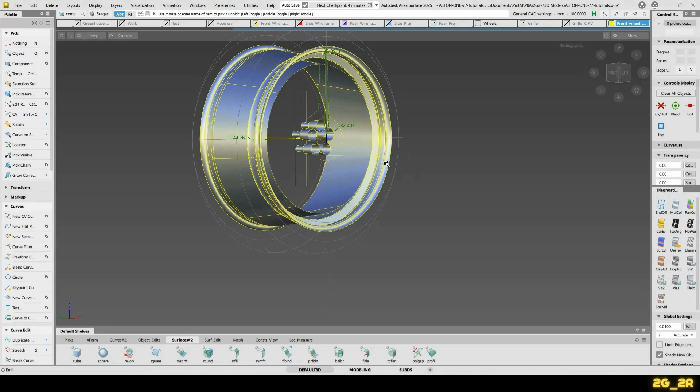That's a good start. Now, let's look at this again. 7 spokes. That's 1 spoke going right down the middle of that. If we split it in 2, we can build only this piece, duplicate once across, and then all the way around. That's pretty good. Pretty good.

So let's get these curves in first. That's what I want to do. I'm just trying to decide how to do it so I know it's going to be nice and clean from the very beginning. So for that, I will work on this layer. I will go into layers.

And I want to create a symmetry plane. So I'm going to set this symmetry plane for this specific layer to be linked to that point. And I want the plane going across the wheel. So that defines, let's say, the diameter, however you want to call it. So it's going to be that plane for me. The reason why I'm doing that, you'll see it soon, is

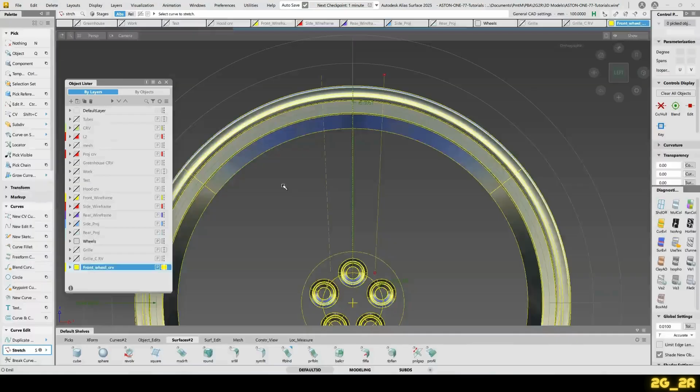That will do. And now let's turn on the symmetry there. And there we have it. That's the magic that I'm looking for. You see that one spoke seems kind of that size there. The other one will be the same size. And then we've got the opening there. So if I take myself a curve that's almost the size of that hole, I can bring it across, up.

And we see that that is happening quite close to the bolt hole, the hole for the lug nut. So, got that in there. Then this curve, I'll move its pivot there, and I'll try to generate myself another one here, which is reflecting the fact that I want to go 7 times around that circle.

But first and foremost, let's do a small offset of that. Let's move it out first. There we go. And I'll do, let's say, a 5mm offset of that. That's that. And let's get this central area in. So that central area seems kind of like the middle there. So let's go like that. I'll open this as well, ever so slightly, but not as much as that one. That's good.

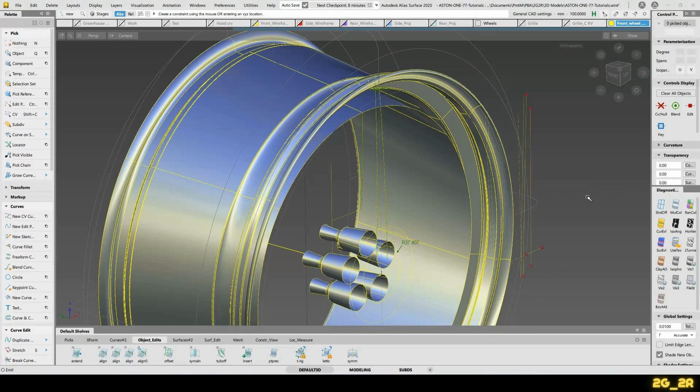So I've put everything on a plane here, so it's easier to work with. Let's get this curve down here, across. I'll make it symmetric. So that CV goes kind of there. I'll make it a degree 3. Get those down, center the pivot, and scale them out. That looks good. So that will be the one spoke.

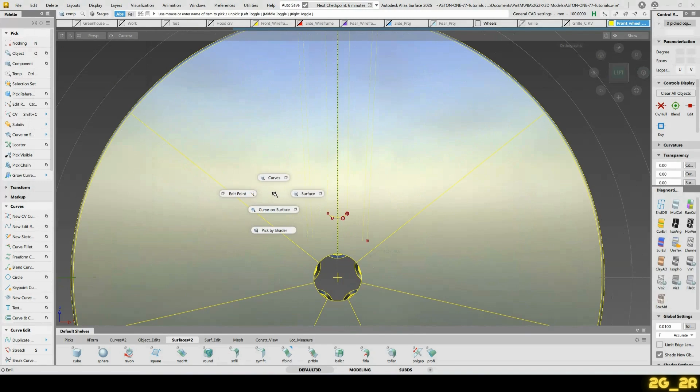And now let's get this curve. And let's do the same thing we've done before. Let's build a revolve here to that vector. And I'll get this down to 360. I'll make sure we've got 7 segments. I'll template these.

These surfaces, I will template them because I don't need them at the moment. Neither do I need this one, because we will be working on this one. So I'll project onto it in the side view these curves. And I'll make sure that I have the same 5 mil width here at the top as well.

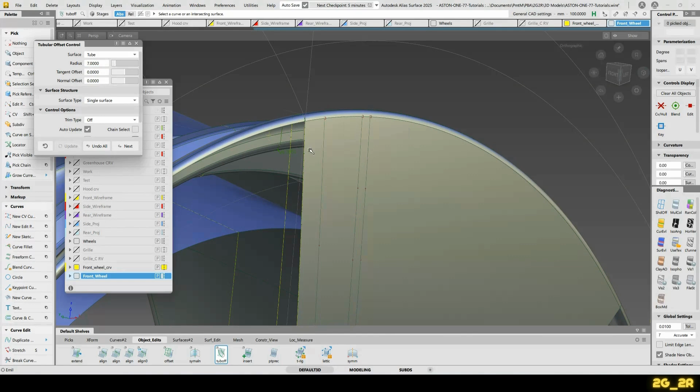So that's going to be done by doing a tubular offset of, for the sake of argument, let's give it a 7 mil because we will have a small radius there. So I just need the curve and surface. That's about it. This current surface, actually, we don't really need it. And we will be keeping only a certain portion of that surface, i.e. this bit here. That's the first part of the spoke.

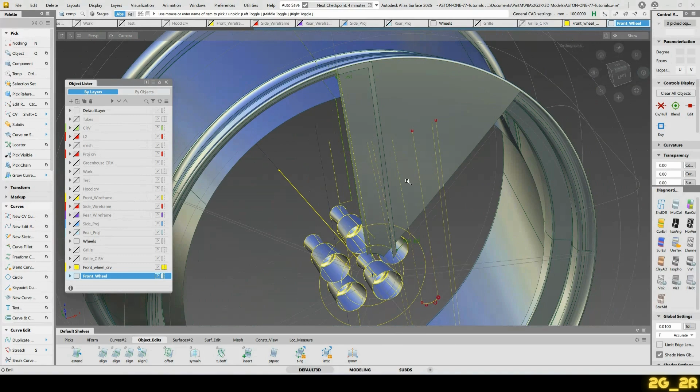Now we've built this other curve here, and I'll do a surface off of that, similar to this one. So let's do this one next, and we'll devise one off of this curve. Same story. These get templated, and onto this one I will be projecting these two, and my first go-to way of building this would be a skin between that current surface, and if we untrim this, it's going to be between these two.

Same front wheel layer, I'll do the same thing like on this layer. So I'll go in and do the symmetry. So I'll set the symmetry plane. Might hide away those templates, so we don't need them for our purpose here. They have served their, let's say, visual purpose for the moment. The rest we keep. Actually, let's get those out of the way as well. It can be easier to read and understand everything.

Now I'll trim this surface back. So this is getting us.

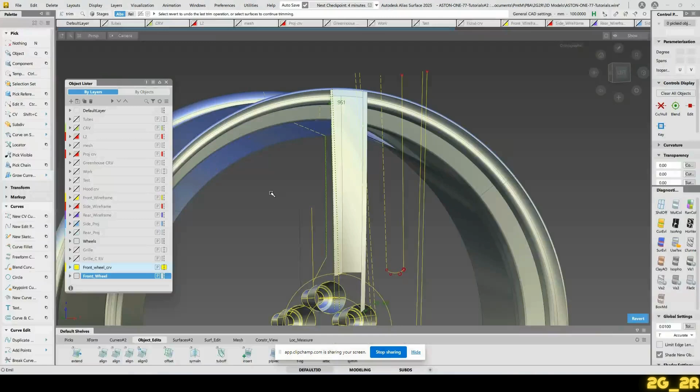You can see that it's actually the other way around. It's deeper in this area and shallower around here. So we'll have to adjust that plane a little bit. Thank God we've got the history working for us, so that's going to be an easy task. That means that we will be literally taking that curve there, and we will be rotating it the other way around. So in X, shallower to the center, deeper on the outside. Move it in as well, so it's got a bit more movement in there.

This is to become a really good modeler, because you'll see a lot of people saying this is what you have to do to become a great one or whatever. In my opinion, the first thing that you have to be able to understand is what you're looking at. If you don't understand what you're looking at, whatever it is, a sketch, picture, a blueprint, and if you cannot read those proportions properly, then you're just a person who has learned to use a software. And the industry doesn't really need these guys. You need to be able to communicate, to understand what people want from you, and work with that. That's what you have to be able to juggle with, basically.

So modeling from pictures, blueprints, everything is building that thing up, but you always have to be able to read a proportion, to read what you see, right? Understanding shadows, understanding light, where you've got a break, where you've got a radius, all these things. These are the things that make you actually valuable. It's not being able to use Alias. It's not about Alias here. You can do the same work that we're doing here in ICEM, or some people do it in Rhino.

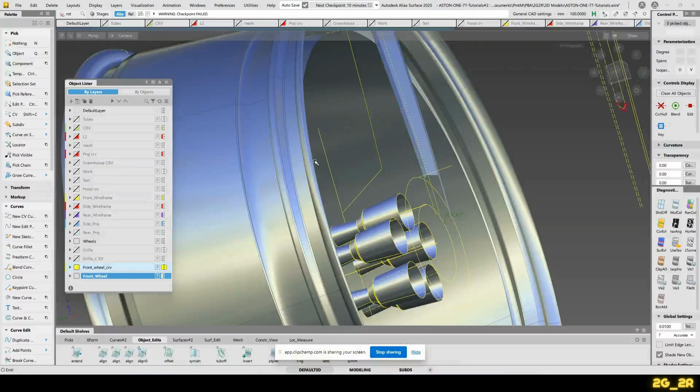And then what we have here is actually a different curve meeting up with this one, and I think we have a radius here. It does look like it's dipping in there. So to do that, just hide this because I don't need it at the moment. I will take one curve like that.

That's the center bore, so I'm wrong here. If you haven't noticed, shame on you. No. So let's take that node, that curve, and move the pivot all the way there. Let's move these up here. These we don't need anymore.

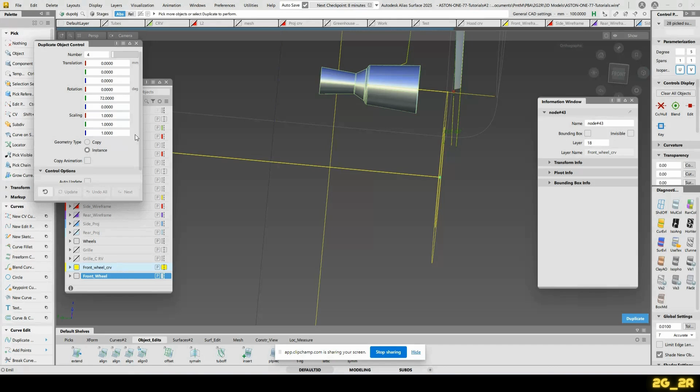And we'll have to duplicate this again. So edit, duplicate object. Let's do number 4. Do the scaling 1, not -1. We'll rotate it in the y-axis 72 degrees. And let's get instances in there. That means that these are, let's see, this is virtual geometry. Let's put these on a different layer. And when we adjust this, in theory, these would follow suit.

Okay, so let's go back to this here. Now we've got the center bore there. We know that we should be more outward. So this curve is 64, that's 128 diameter, and these are 5 sitting on that. So let's jump back to this. Now we're going to get closer to these proportions. So we see that there isn't much distance between that circle and that one.

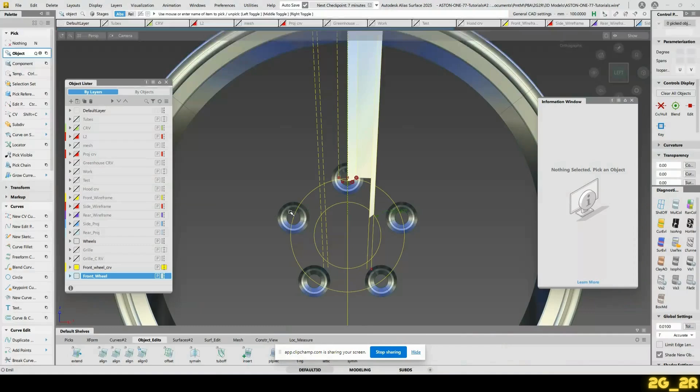So what this means for us is that this curve moves. Let's say we increase its size and move it up. First to sit where that hole is sitting, and then let's say 4 mil higher up. That will be our opening then, that surface there. Now, if we add these surfaces onto this layer here, turn on the symmetry, we will be seeing the first spoke, which is really cool because now it starts feeling more like what it should be.

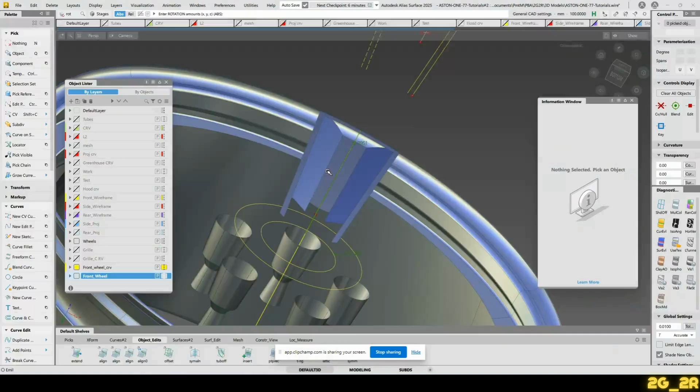I'll take that curve and I'll rotate it a little bit back. This is too shallow now. And you'll see that modeling a lot of the times is a lot of trial and error. And let's move the pivot. Got a radius here. And we will have to emulate that section as well. See, this inner bit, that's very important. And this thickness looks almost like the width that we have there. So that's a very good thing.

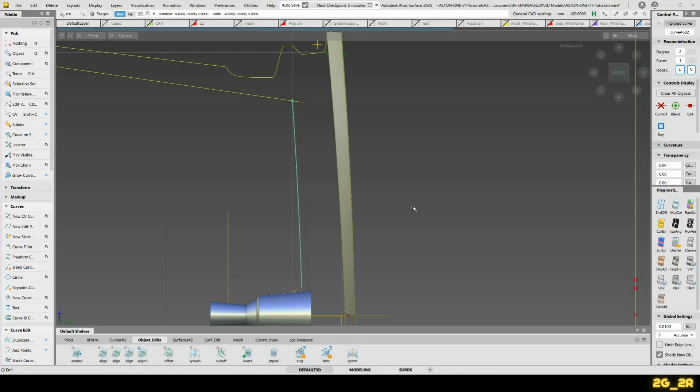So I'll use my dynamic measuring tool. And I have here 25 millimeters. Hide this away and make sure that I take that curve and offset it by that same amount that I've seen there, 25 mil. The other way around. So here we're pretty good. Let's move this back here, rotate it, more like that. So it's still opening a little bit to the center. That looks nice.

This curve moves up and gets flatter a little bit. That's it. Now we don't need this anymore because we have that in there. Got that dialed in. Let's bring this back here. And now, if we go back to this, we have that, and then that. So let's look at those things together. And we see that we have a little step there. So this edge is actually hitting a little bit more inboard compared to where the back of the spoke is hitting that same surface there. So let's do that.

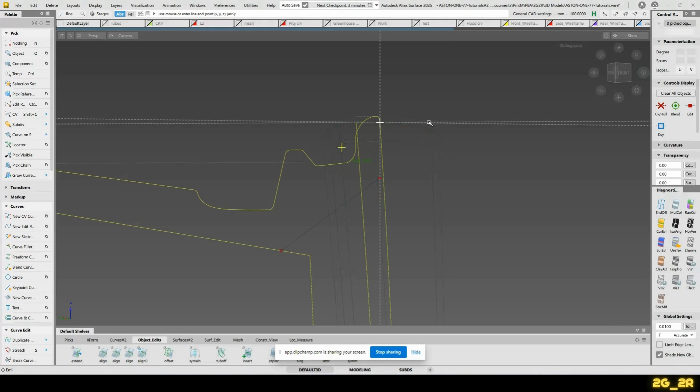That means that we have this here. My rough guesstimate is that we will be landing somewhere here. And that is that surface. And here, that is more or less twice the size of that. It's 1.5. So if we have 5 mil, 6 mil actually, in that area, let's do 9. So I'll get that line dialed in there. Whoops, that was a bit confusing. Let's do 10 mil. Let's rotate this.

Oh. Let's move it first in the correct position. It should be sitting there. Now let's rotate it on the x-axis. That's it. Here we shouldn't have less than 2.5 mil. So let's take that curve, offset it, let's say 3 mil for the sake of argument. We know we're fine. That's good. So that's a nice and stable rim.

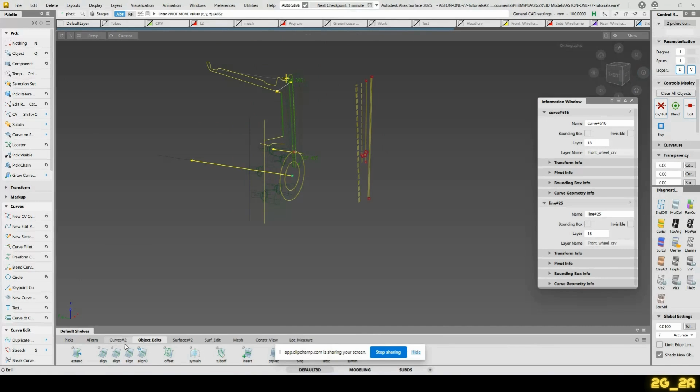That's it. Now this goes in there. These two curves go onto the curve layer. Let's move their pivot also there. And let's generate our nice revolve. That's it. So now we're starting to resemble more and more what we are seeing there, which is really good. And in here, we will do it a little bit different. So we see we've got a nice sweep, which is not hitting that surface, which is also nice to see.

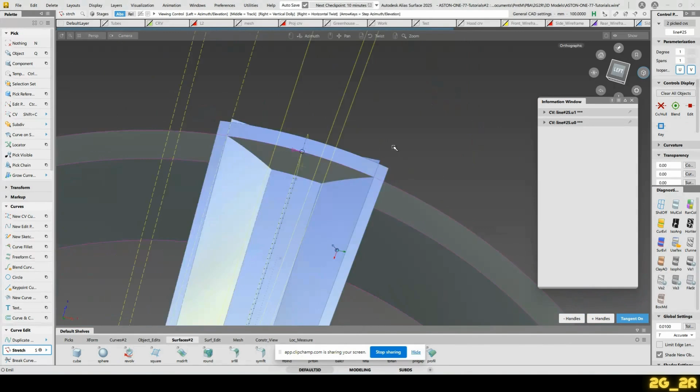This also means that our surface here should come a little bit more outward. Still keeping that same feeling. And we can take these points here and move them down a little bit inward. Still got the space, that's good. Just can jack this up to here. That's good. Because this will allow us to do the following thing. That there, which is important. And for that, what I want to do is actually take that surface, untrim it.

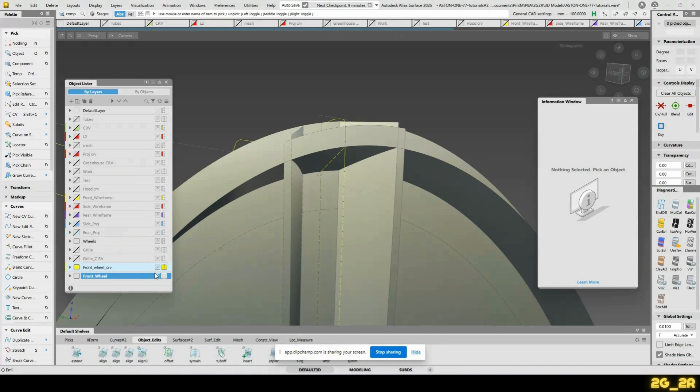Now I'll do tube offset on that surface. This one here. Let's give it proper radius. I just want the curved surface. Let's see, 30. Looks like it. For the moment, I'll do a blend, freeform blend from that edge there to that surface and to that edge there. So the curvature to position on that. The inner surface is actually touching that point as well. Very interesting. As I said, we need to really understand what we're doing here.

So I can generate one more revolve to add it to that one there by shift clicking that surface, that curve there. So that's looking good. Might reduce this by a little bit. So instead of being 30, let's go 28. I'll hit this up here. That's nicely jumbled up.

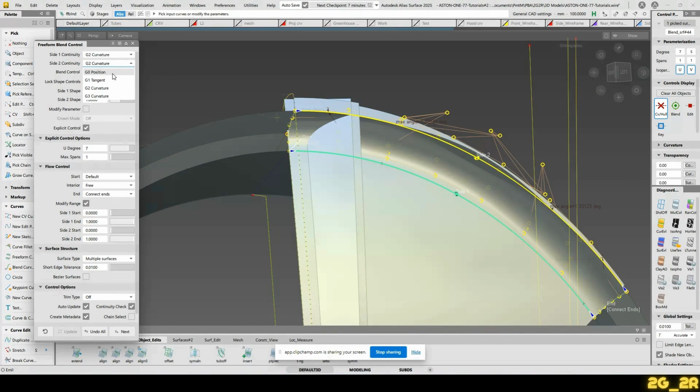Tangent there. Busy. No, let's not do that.

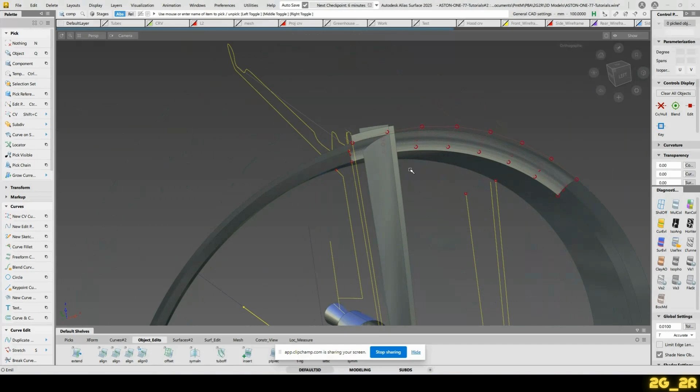Okay. And as you've seen here, these are negative, so let's get that skin working the correct way. Okay, so this, trim it back here, you can template it for the moment. And let's add these surfaces where they should be. And let's intersect this surface with this one. Edge there, just to make sure this is nicely closed.

We'll have to fine tune those to get the correct intersection, and then we will rebuild these surfaces to be nice and proper clean. Now the next thing that's important is to have the drafts, because we have some drafts running inboard. So I'll untrim this, put a draft on that surface in the Y direction, make sure it's a single-sided surface.

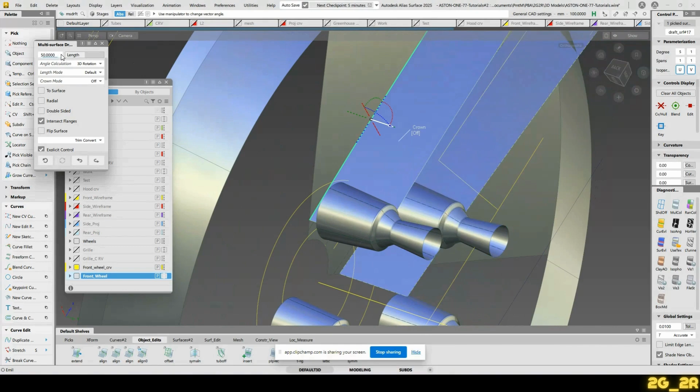Let's give it just 100 millimeters length. We don't need that much. We know that we've got 25 at the back, so 50 would be also enough. It's good. And we need to give it some draft angle. Let's stick with 5 degrees.

This draft angle, it all depends on the manufacturing method, so this will be given to you as an information when you build these things, but it's also in your design modeling. It will show the fact that you do have an understanding of this topic. Same thing on this inner edge here, but the other way around, the angle, so -5. That's good. So things are shaping up very nicely.

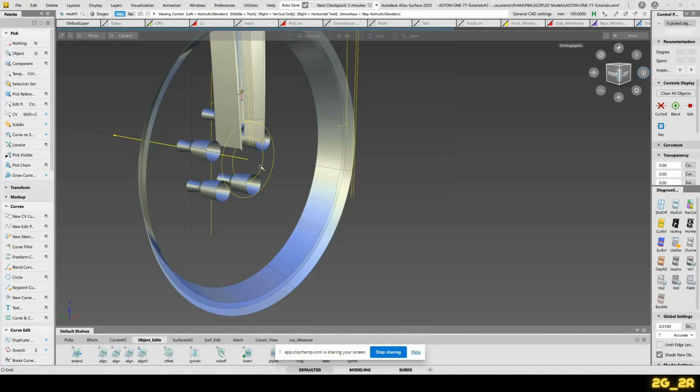So that's the one spoke. It's all cool, all nice, but we still need to get to the center there, where we actually don't know where the center is. So let's start doing these things. So we've got the center bore. I'll get that line up there, extend it back to the ET. That gets also extended back to that point here. We're coming to this point. This will be the hub.

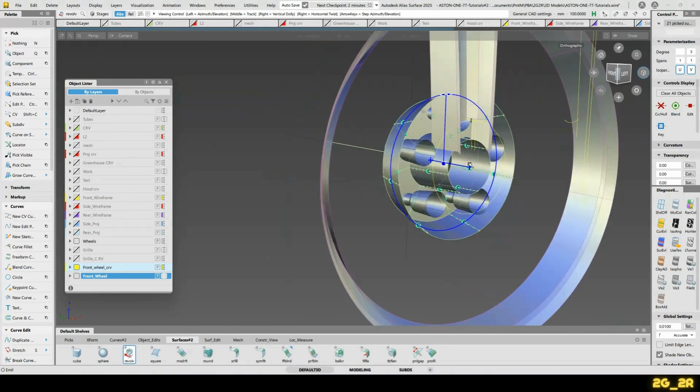So these curves. Here we don't need 7 bits of that, so let's put the pivot here and let's revolve it on the same bit there, but let's do only 5 segments. We've got 5 lug nuts. That's cool. And let's see what this depth is here. 13 millimeters. That seems plausible.

Let's take that node and move it back by, say, 3 millimeters. And you see everything adjusted with it. This is why I like working with instances there. Okay, cool. Now we have that center bore there. We have that. Now let's look at the picture again.

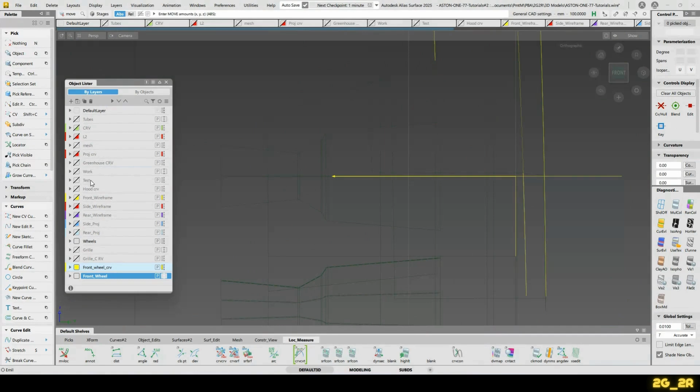The lug nuts. If it's 35 mil, that, and let's look at this canvas. Or I don't know where that canvas is, so I'll jump back to here, 35 mil from that base there. That means that we will be looking at 35 mil from here outboard.

And then what I want to do is go up like that. This is actually working with a reference, more or less. I'll go up here, so it's sitting a little bit more outboard compared to my lug nut, just as it does here. See, here it seems to sit below it towards the center, so let's do that in here.

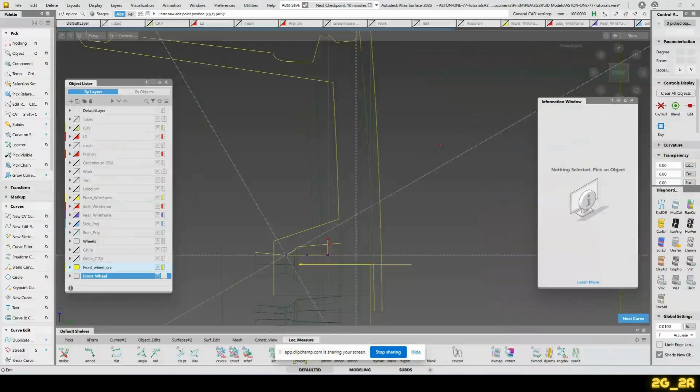Let's move this down to that point. This curve we adjusted to that point there, and we have this curve here. So let's bring this back here. Let's give it some crown. Let's extend this curve quite a lot, so we do get an intersection there, and these will be sitting quite close, so that's looking promising.

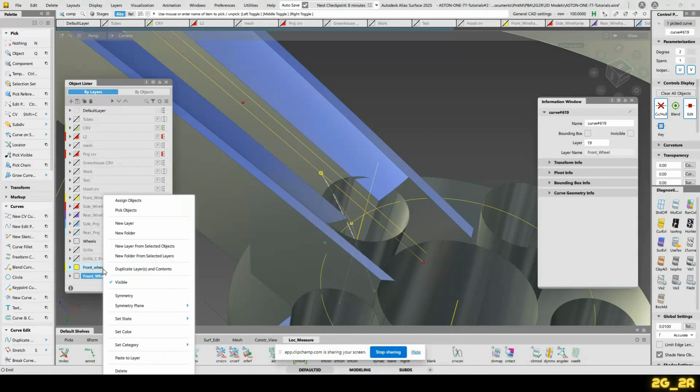You'll have to also make sure that all of these curves sitting around here, that they share the same center. So let's take these curves, delete any history on them, turn on their CVs, take all these CVs. So I was saying that we should take all these CVs and move them so they sit on the plane on which our vector is sitting. So we know everything is done correctly.

And then on this layer, we align the same symmetry plane like that one. So let's go into layers, symmetry plane, set symmetry. Sitting correct, so it's all good. Now let's go back to this. Take that curve there, move its pivot around there, generate one more revolve.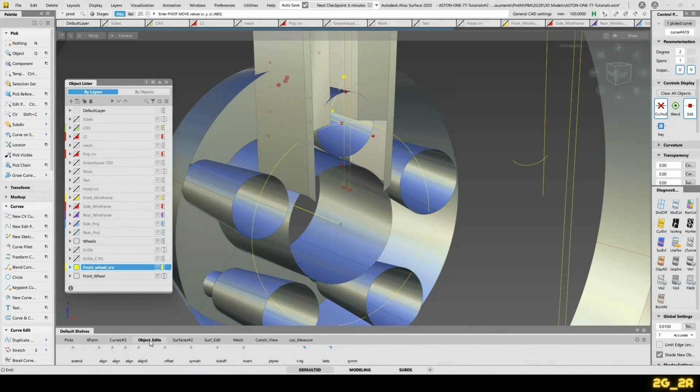Probably you've noticed we are generating a lot of revolves here when we're building wheels. This is actually the fun part of it. Once you get the hang of these things, at least to me, these are becoming quite nice to work with. So let's extend that curve a little bit more. There we go. Actually, we should intersect our center bore with it. And let's trim this bore back.

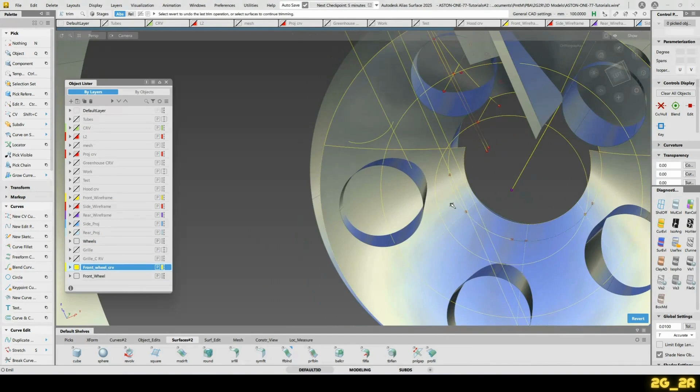Let's intersect this with these two surfaces. Keep this, that bit there, that bit there. So now we're starting to resemble more and more the situation that we've got in here, which is good. That's actually what we want.

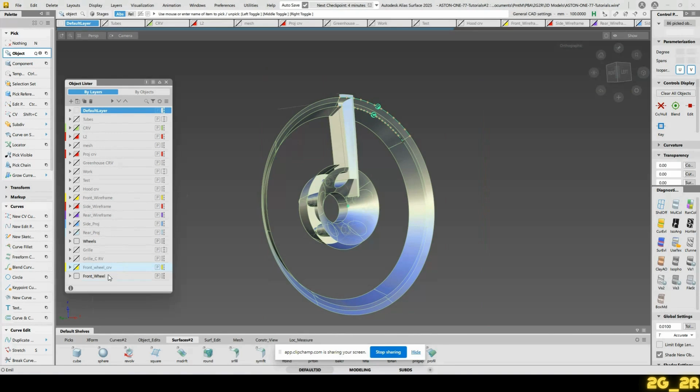Let's put all these surfaces in here, all the curves on the correct layer, the objects where they belong. So once you place a surface, that doesn't mean that you've placed the object as well. That's another important bit that we need to remember.

Now, let's see, we've got that curve there. Move this pivot down here. I'll generate one more revolve, as you've probably guessed so far, and we'll go here also with only 5 segments. We don't need the 7 segments.

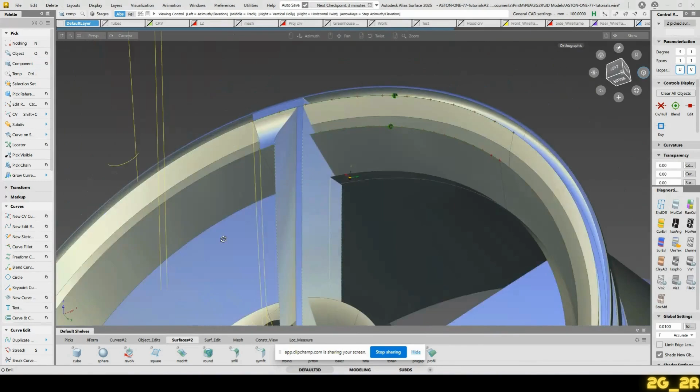That's good, because then we can intersect these drafts with that surface there. And then let's see the rest of the surfaces we're missing. We can intersect the same drafts with that surface there, that surface,

we project on top of it a revolve there. So this allows us to trim this back like this. We keep these surfaces as is. Actually, they have to get intersected with the hub.

These get to be templates. And we keep on going like this. Now we've got all that.

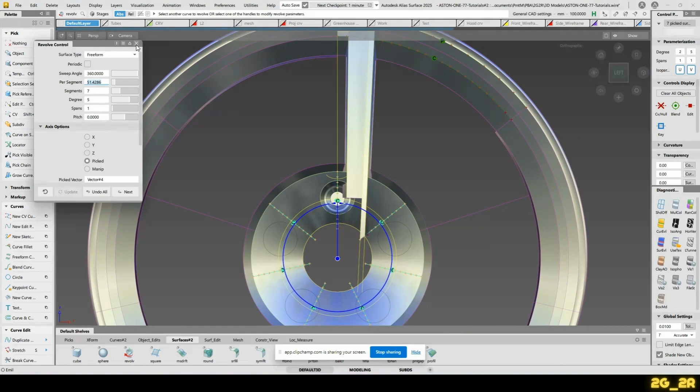These bits hold a very important number in them. So when you bring up the history, the segment, that number, I'll copy paste that, because what I want to do is take these surfaces,

move their pivot over there, and then go into duplicate object. I'll generate only one in the Y direction that way, and I'll put a minus in front of that. And if I'm correct, then I will have a spoke that moved across there.

So again, I'll copy now. That's the correct one. I need one. Let's duplicate it like that.

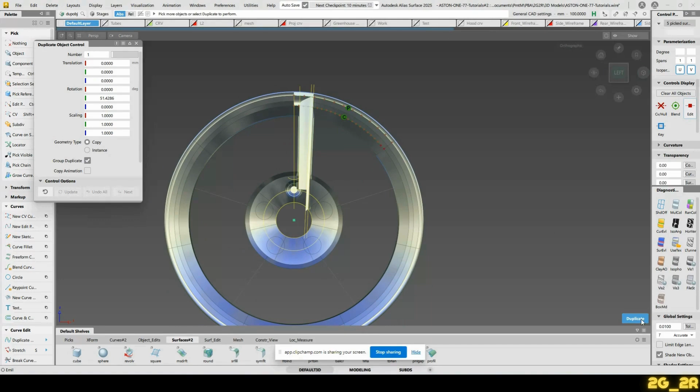That's the bit that I was missing. So I did duplicate object, again, I'm doing it wrong, so let's go again. Doing it wrong because here on this side I actually need the mirrored bit of that. So let's duplicate that object. I'll just mirror it across the YZ plane.

So that's relative to that and to the plane. So let's see what plane I'm using here on this layer. So front wheel, layers, symmetry plane. So we've got Y and X. That's why it didn't work.

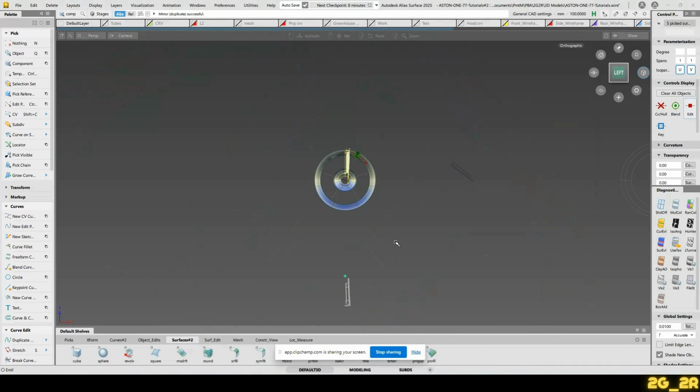But if I'm wrong, then someone will correct me. But I'm going to correct myself here. So Y and X. Let's see this.

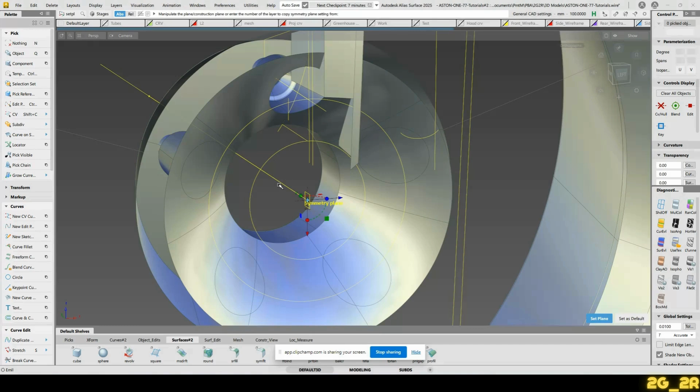That's the Y direction. That's the X direction, the Y direction. I'm a bit confused here. Since I've moved my plane, I'm a bit confused here, so bear with me. That was it.

I'll do a check here. We should get tangent connections here. If that's correct, then we can keep on going. That's perfect. Okay, now that we've got that,

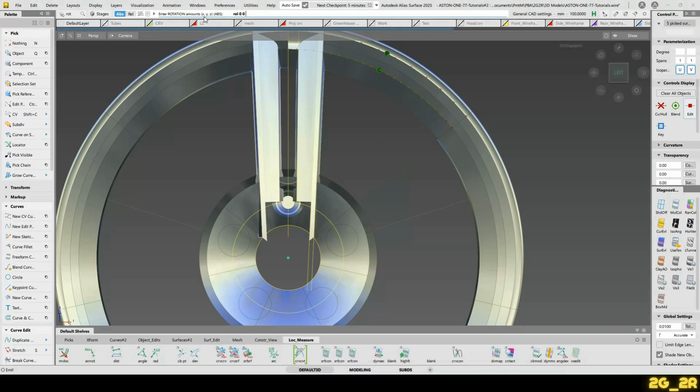we've got the center. Now we'll rotate this in the Y direction by the amount that I was talking about. This is very helpful because this bit becomes this bit here. That's important for us to be able to achieve what we see here, get that in, dialed in there, and

that's interesting, to say the least. So back to our reference images. That is getting very close to that line there, so

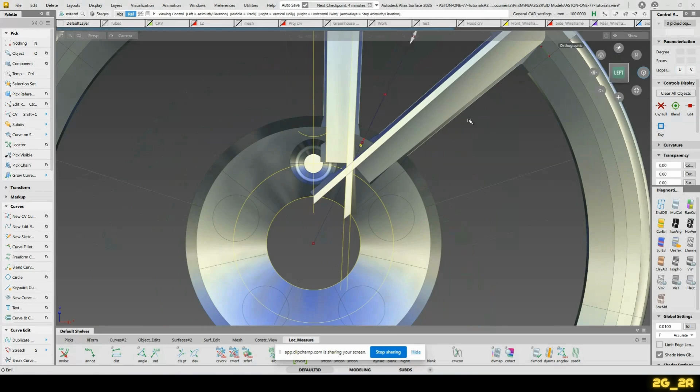the center of the blend between the two should sit somewhere around there. Get this reference dialed in. And we also need one more reference, and that will be from the center to hit that point there, because that's going to be, say, the half of our spoke. This is where we will be cutting what we generate here between the two. And that's very, very important.

So that goes somewhere around there. Let's build a radius between these two surfaces. Let's increase the size of that, kind of to this point. Let's say 38.

Now, what I want to do is take a key point curve, and I'll take perpendicular line, and I'll change the settings to be true from the curve, and the curve that I'm using will be this here. So I'll go this way and hit it in that direction, then I'll go the other way around, hit it in that direction, and now I can project in the side view these curves onto these surfaces.

So what we're doing is actually building that valley there, closing this up so we get this done and working. So we can actually trim it into two bits, mirror it back to this side here. Once we've got the complete spoke mirrored, that's when we rotate it, get the 7 spokes. A bit complicated, but it's stuff that you need to do to be able to proceed with these things.

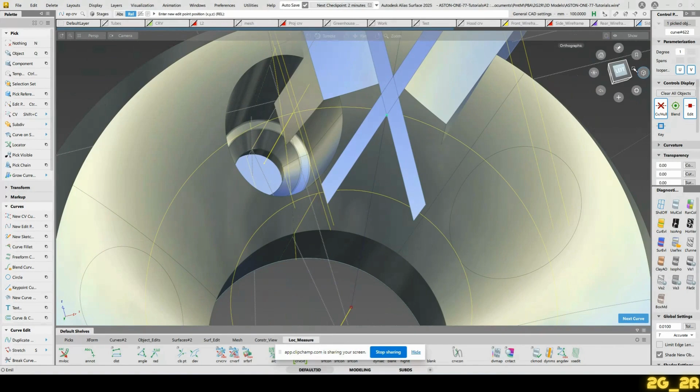Also, this bit will be important here, this theory point, going from here down here.

Let's project that line onto that surface there. Take that point, back there, this one down there, and we'll have, let's say, the theory between these bits here. So for that,

okay, now that we have that, we can go ahead and try this. So I'm going to hide these curves and build a blend, trying to emulate what we've got here in this radius.

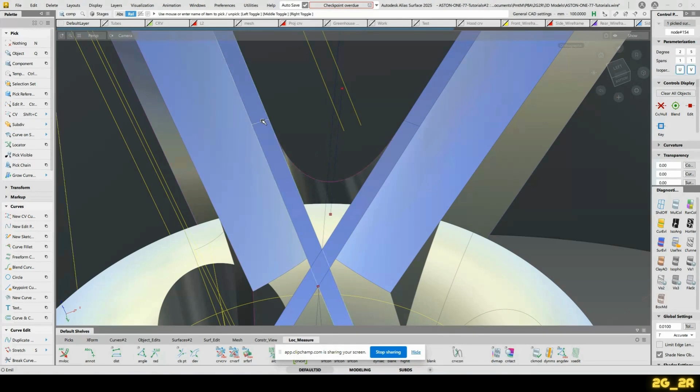Align on both ends, curvature. Now let's start adjusting this. Lock the shape controls, get closer to what we have there. We will be adjusting this anyway, to keep the amount of work as low as it can get. So we have that there.

CV layout on the radius is nicer than here, so let's work with that. So I'll delete the history on that, realign it there.

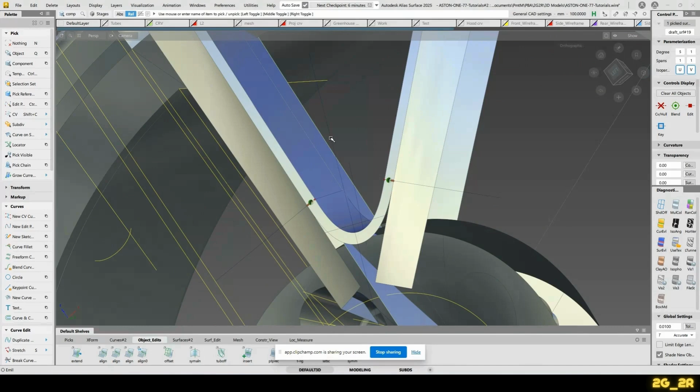We've got those things working. Now we need to get these ones working as well. So that surface is that surface. Let's project onto these two, these curves. Let's build the blend.

These two. I'm not so keen on this here. This is the odd bit about this here. Looks like here we've got an intersection with this surface here. It's going this way, which is interesting.

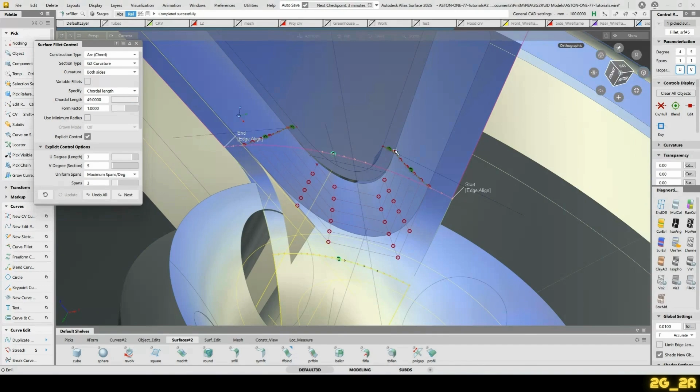Let's build a nice radius between this surface and this one. Let's see where this takes us. Let's increase the size here to get us closer to that point where the radii start on the spokes.

That's more or less it. Say 49.5. 0.8. I like to coordinate that start of that radius with this one. Okay, now this is getting more interesting.

What I can do is actually go ahead and do this. So that surface can get to be a template again. We have this surface here, which is basically this inner one this way.

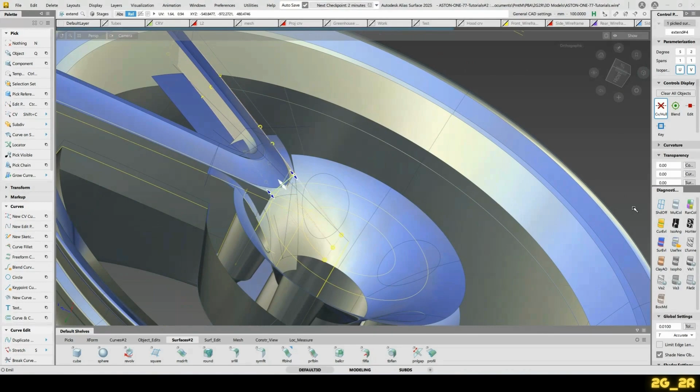One of the reasons why I don't really like the option of using draft surfaces is that they are not reliable. A lot of times they get rebuilt and then they do whatever they want to do. So...

Try to build here a clean surface. It's one generation on 2 rails. That's it. And I'll turn on the explicit control and keep these as simple as possible. So that should do it.

And now let's turn on rebuild on both so we get cleaner surfaces. That's it. Now I want to extend this surface here. Perfect. That way, this way.

Now we'll be doing the same thing with this one here. The reason why I want to do this is I want to find the intersection between these to have a proper surface there. So same thing again.

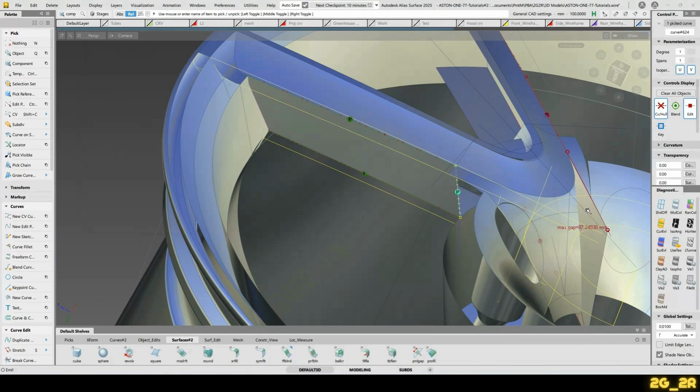I was aiming to get you a nice short video with all the basic stuff that you would need, but it doesn't look that way, does it? So...

If these intersected this surface, this intersected with this surface here, and both of these intersected with these. We don't need them. They're just standing in our way here.

The good thing is that we could generate skins like these from here down to that edge there.

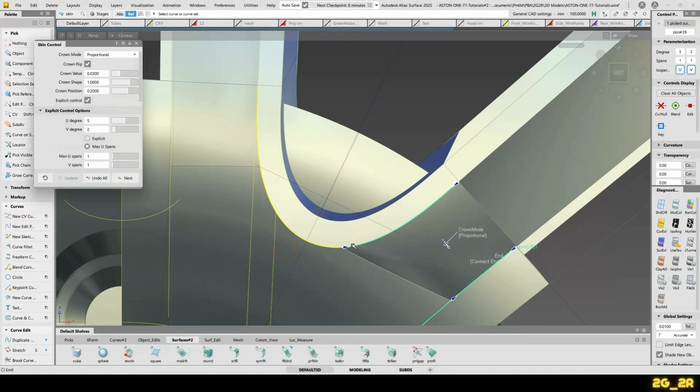Now that we've got that, we can go ahead and build that blend there that we're missing. I'll just build a blend curve here.

From that skin to the other skin. Get it looking right. So pull up the history of it, align it correctly. That's it.

And let's build that surface in there.

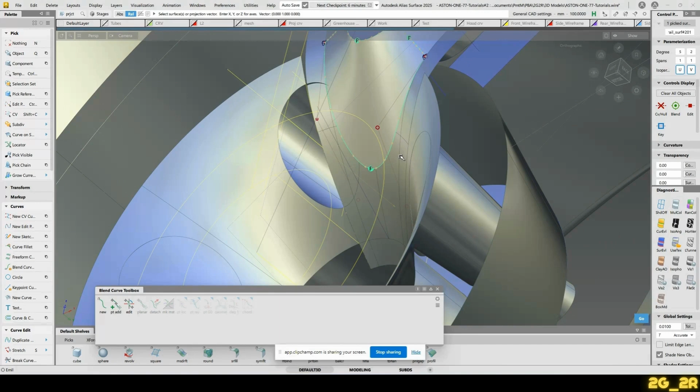Make it even easier for us. So side view projection onto that base surface with that blend. And now we know we're sitting correctly.

Let's do this type of surface from here all the way down to that there. Do a default on both. Set it up like that. Actually, even easier.

Blend this. From that to that. And I'll go curvature to position. Set it up like that.

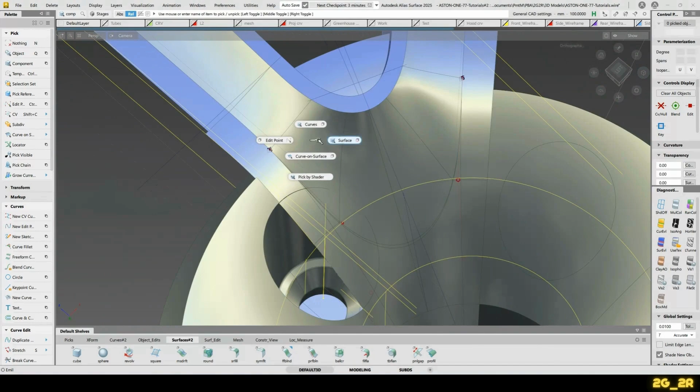That's perfect for our task there. Let's see the highlights on these. I'm sure they're really bad. Yep. So what do we do here? We have to build correctly, so let's take away these.

Let's look at these, what's wrong with them? And let's start adjusting that. So here I will decrease that to 5.

Make it just one surface, and I want to clean this up first. One surface with one span in it, two spans in it, and I will work that surface manually a little bit. So I'll go ahead and turn the degree up to 5 there.

So what we are missing here is actually this. We are generating a massive dip in this surface here. So when we look at the CVs, here on the side, they're looking good. And once we are away from that, they're getting awful.

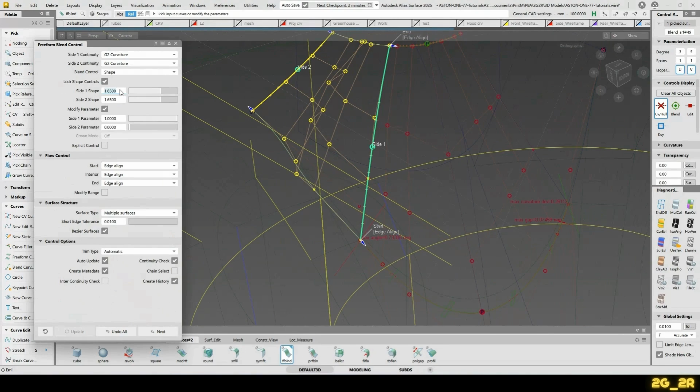So, freeform blend this. And let's take care of that surface. So that gets a degree 5.

We will slide some of these CVs here, slide a little bit up. That slides a lot, because I want to align this hull with that one.

Same on here. And then the same with the other ones. One clean CV - I'm looking for a clean CV layout that gives me the quality in the surfaces. So once I have that dialed in, then we can start talking about other topics.

Now, these CVs could also slide in a little bit, just to align these other ones to make them sit clean and nice.

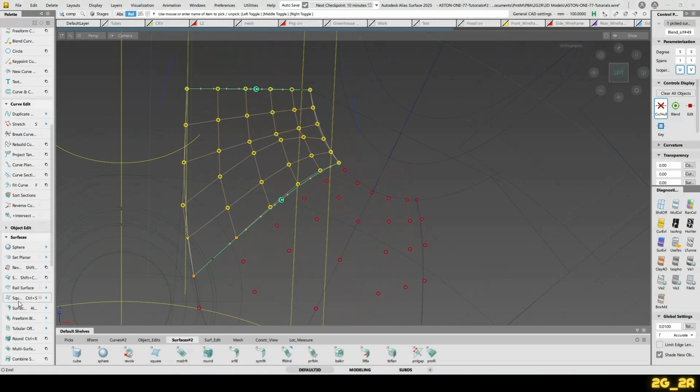This hull can do with a bit of fine tuning, so that loses its history. And now I go into planarizing these hulls. That one gets done like that. This one gets done like that. This one as well.

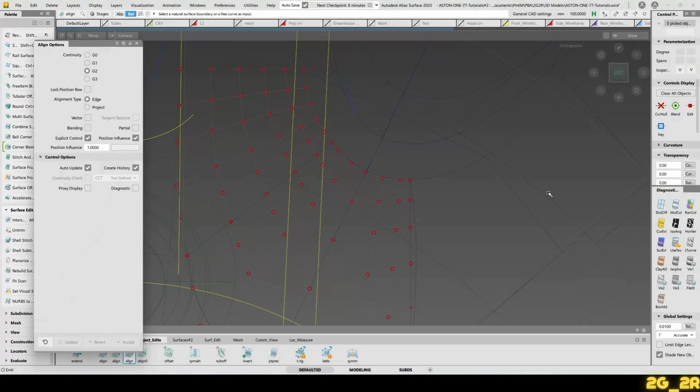There we go, that's kind of cleaned up. Now let's realign that blend to that surface. That blend to that surface there. Because now we want to take care of the dip there.

So what we will be doing is looking at these in transparent mode, and we will take that hull, start pulling it out in the Y direction, till the transition from one side to the other looks good. Same here, I'll be pulling these out.

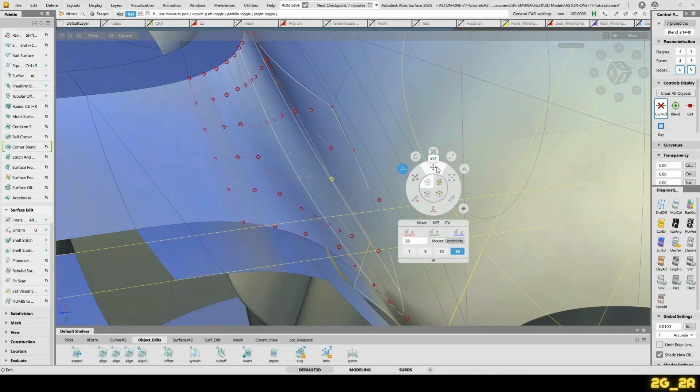Start seeing how these start to clean up. Still not optimal, but it's getting there. We might as well break away from the connection there and move this out. Some more cleanup will be due.

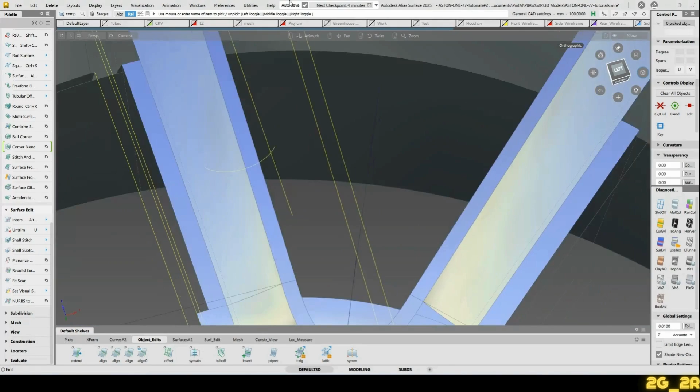Let's trim the surface back with that curve. Same these ones. Turn on the patch precision on this one just to control something. That looks good, looks clean.

Cool. So we don't need these curving surface here anymore. Or do we need them here? We do have what we need.

What we do need now is that curve moving up like that, this surface actually intersecting this one here.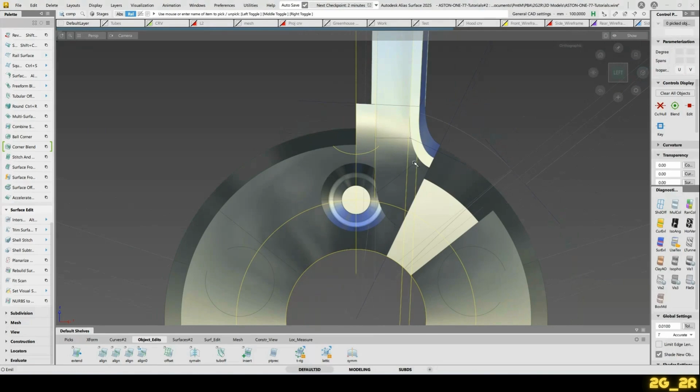Now let's start having fun with this. This front face, 7 bits of it, so that's good. Don't need this front one either.

What we do need is this template here. And we need to look at this picture. So we don't have a close-up there. I would project that curve that we had in there onto one of these surfaces to generate what we need in here.

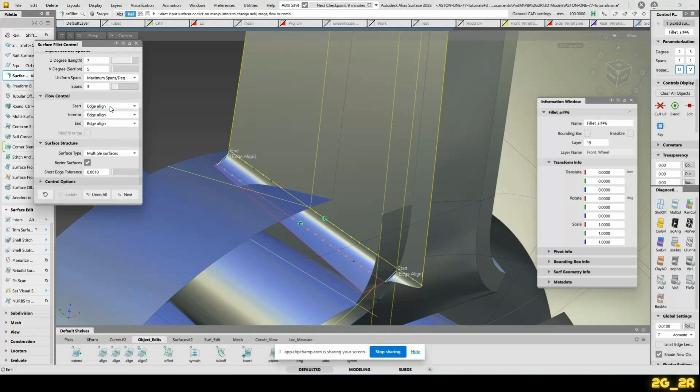What I want to do is actually generate here a fillet between these two surfaces, to finish this up. So we've got starting point, I'll keep it as edge align. Now what I'll do, I'll make sure to keep it as a variable fillet. Pop an endpoint there on the line, and then play with this so we almost make this bit disappear.

That's it, it looks pretty round to me. Let's intersect this with this. This stays. That's all we need. This one gets bound. Cut back these two, and this surface, they will intersect that one there.

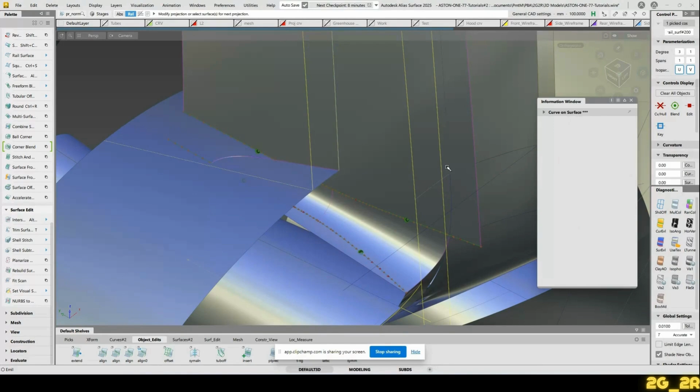And we're slowly getting closer to finishing the main volume of this spoke here. It's been a long road, but it's rewarding.

Let's extend this to the point where we can project that edge to that, and where we can intersect that surface with this one. So we keep that little bit. We can trim this back.

That we don't need anymore. Just template it back. Let's untrim this surface now. Keep these bits like this. This here.

And now let's generate some radii here. Save up first.